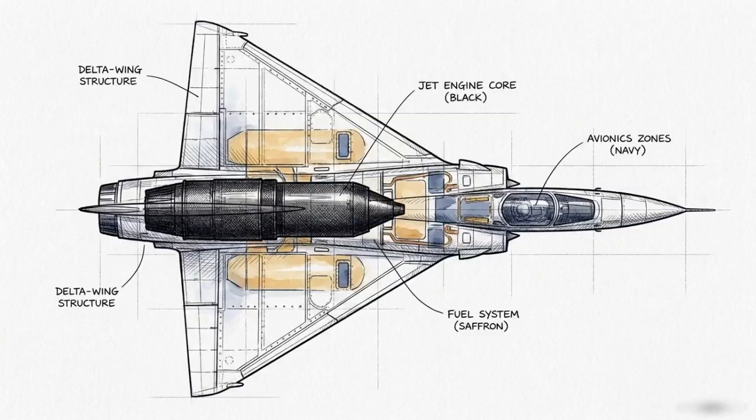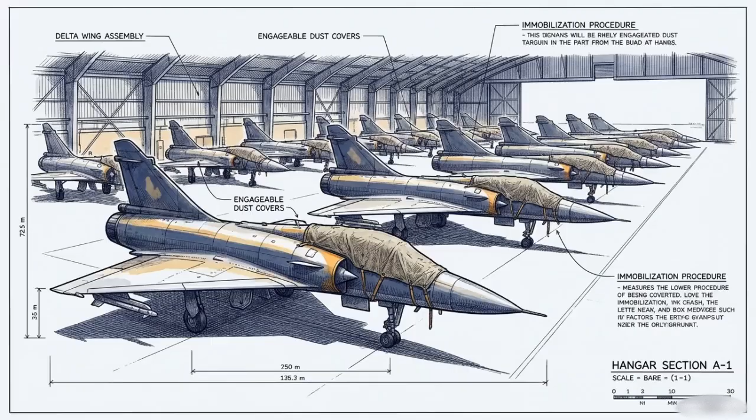The HAL Tejas light combat aircraft is often presented as the ultimate symbol of India's indigenous defense capabilities, but that image hides a critical reliance on foreign technology. The Tejas depends on the American-made General Electric F404 engine for its thrust. This reliance creates a geopolitical vulnerability.

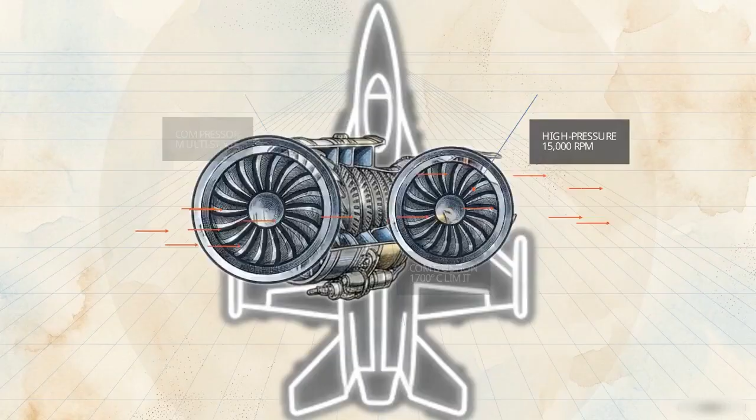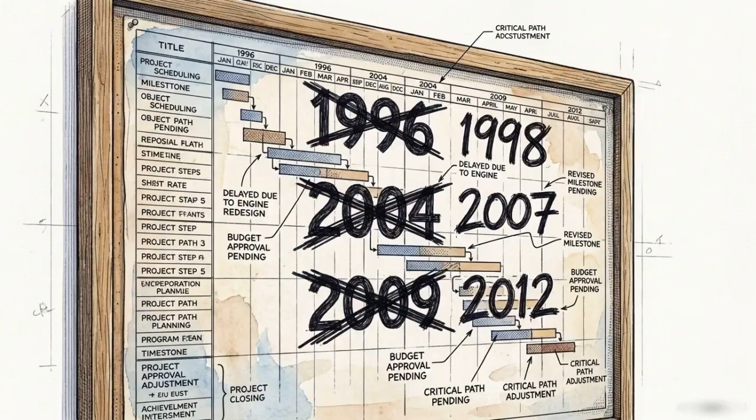If diplomatic relations sour or international sanctions are imposed, the flow of spare parts and new engines can stop, potentially grounding the entire fleet. Real military sovereignty requires a nation to do more than build the airframe; it must be able to design and manufacture the engine from the ground up. In the late 1980s, India's gas turbine research establishment set out to close this gap. They were mandated to build the GTX-35VS Kaveri, a completely indigenous engine for the Tejas. The project became a cautionary tale of aerospace development.

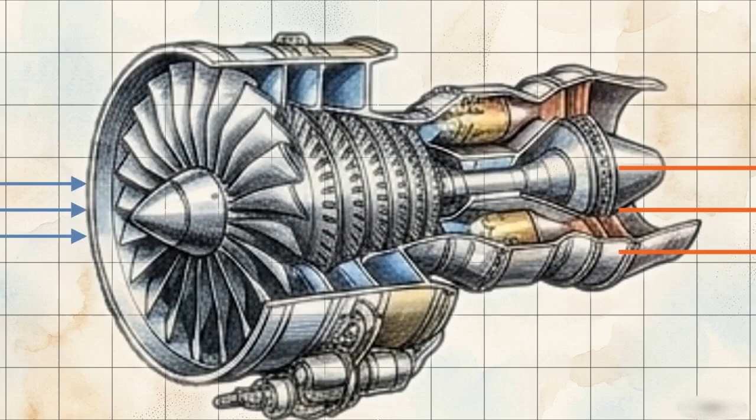It stretched across 30 years of missed deadlines and cost billions of rupees without ever reaching the Tejas production line. Why was a nation that can launch satellites to Mars unable to build a working fighter jet engine for three decades? The engineers understood the mechanics of jet propulsion. The problem was that they had run directly into the physical limits of material science.

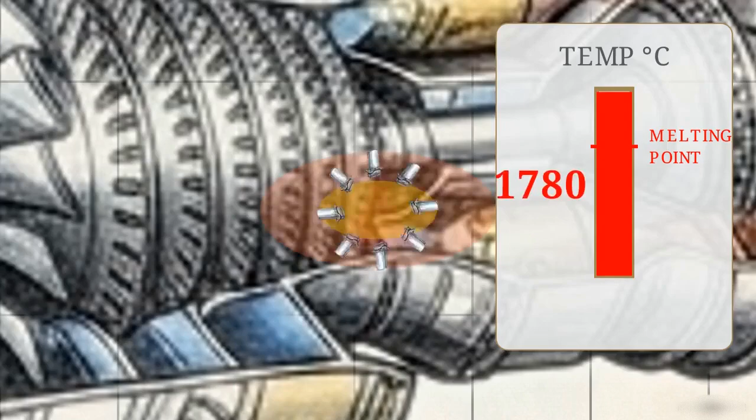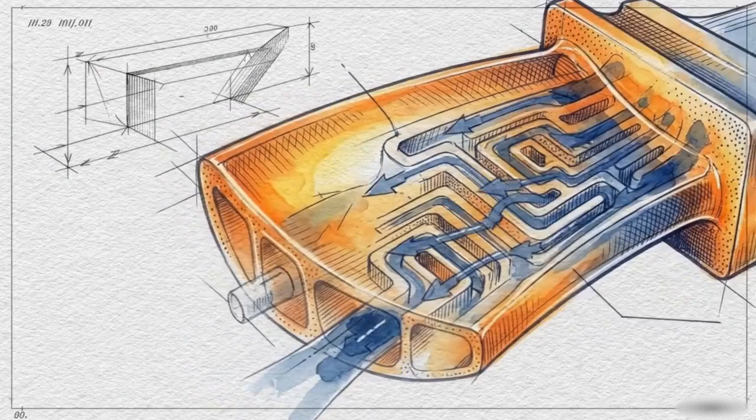In a turbofan's core, the combustor and turbine operate at extreme temperatures, exceeding 1700 degrees Celsius, while spinning at 15,000 RPM. This thermodynamic bottleneck is hundreds of degrees hotter than the actual melting point of the metals used to build the turbine blades. To survive without liquefying, these blades are grown from a single, continuous metal crystal, containing an internal maze of microscopic cooling channels to bleed heat. Mastering this metallurgy is what separates aerospace powers from the rest of the world.

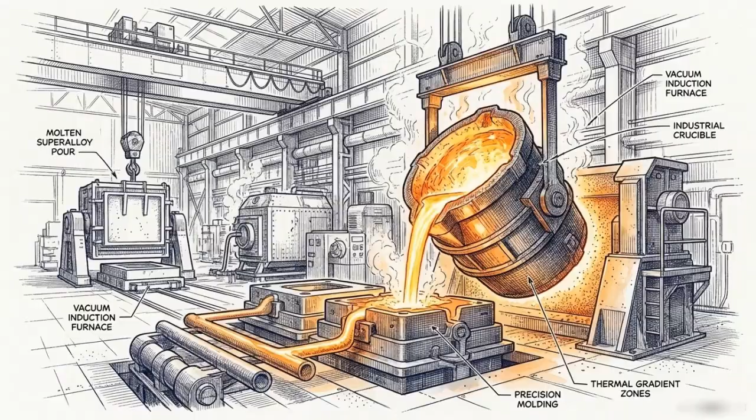India lacked the foundational material science to keep its engines from melting during high-performance testing. In 1998, India conducted nuclear tests at Pokhran. The international community responded with sweeping sanctions that crippled the Kaveri program. These sanctions specifically targeted India's access to critical Western technologies, materials, and high-altitude testing facilities. The DRDO was suddenly isolated.

The resulting engine was too heavy and underpowered. It achieved just 75 kilonewtons of thrust, well below the 81 kilonewtons required for the Tejas, leading to its official delinking from the aircraft in 2008.

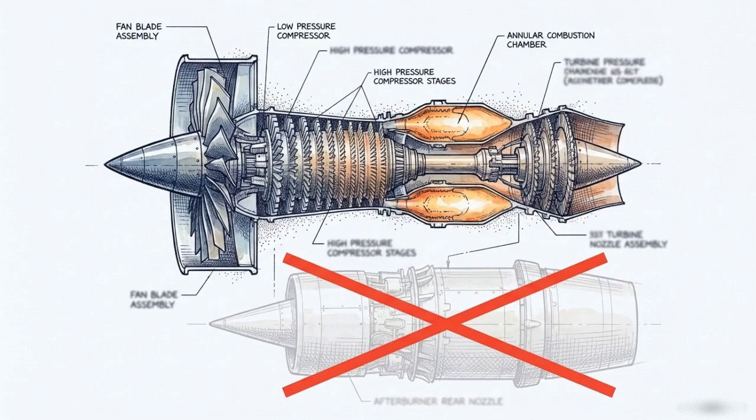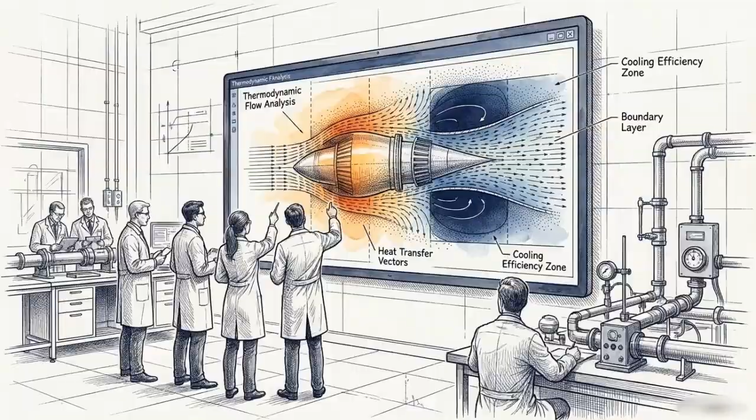Instead of abandoning the research, India pivoted. They removed the afterburner to create a dry Kaveri, an engine variant intended for the Ghatak stealth combat drone. This pivot kept the expertise alive. While the Kaveri failed to power a fighter jet, it forced Indian labs to learn the baseline mechanics of jet propulsion, setting the stage for a new strategic approach.

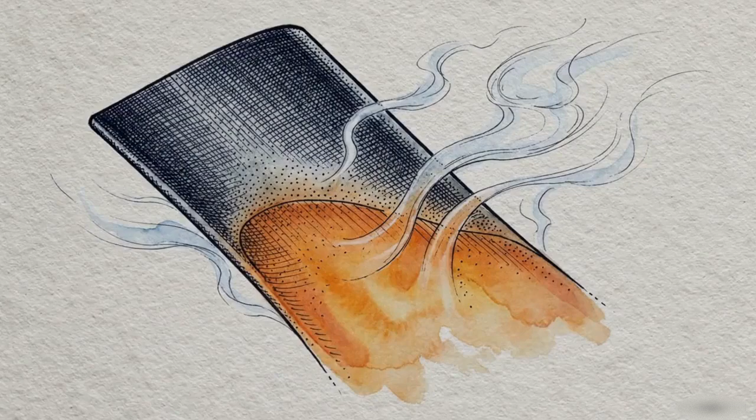That new approach materialized in a massive co-development deal with the French firm Safran to build a 110 kilonewton engine for India's next-generation fighter. This new deal isn't a simple purchase. France has agreed to a full transfer of technology, including the proprietary secrets of the engine's hot section. For the first time, India will have the blueprints for single crystal blades and advanced thermal cooling, the specific metallurgical secrets they couldn't crack alone.

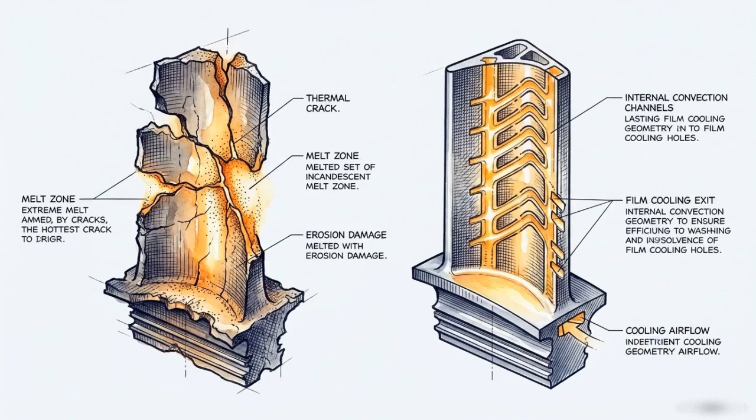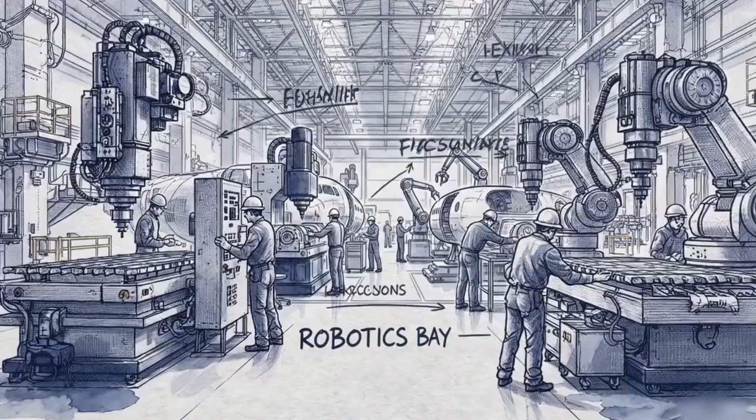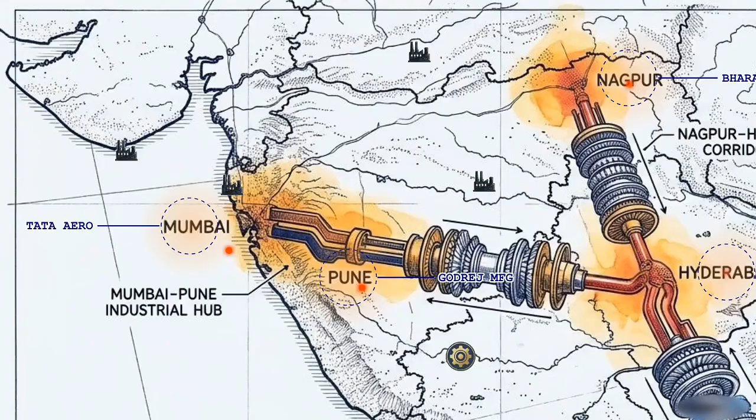Owning these blueprints provides the technical foundation that India's labs spent three decades trying to reverse engineer. It identifies exactly how to overcome the material limits that stalled the Kaveri for years. To move these designs from paper to hardware, the Ministry of Defense issued a 2026 expression of interest to find a brand new domestic production partner. Industrial groups like Godrej, the Tata Group, and Hindustan Aeronautics are now tasked with building a high-tech supply chain capable of executing the sub-micron tolerances required for modern aero engines.

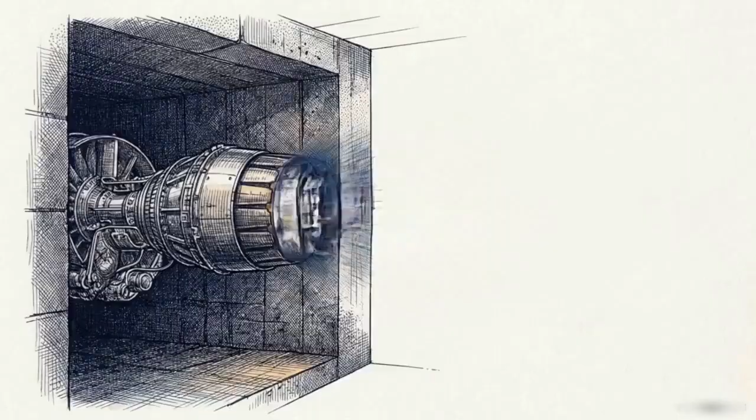The objective is a future where the next generation of Indian air power relies on integrated hardware produced entirely within Indian borders. By mastering the hot section through this partnership, India joins the small group of nations with the strategic autonomy to produce and sustain their own frontline fighters without relying on a foreign power.